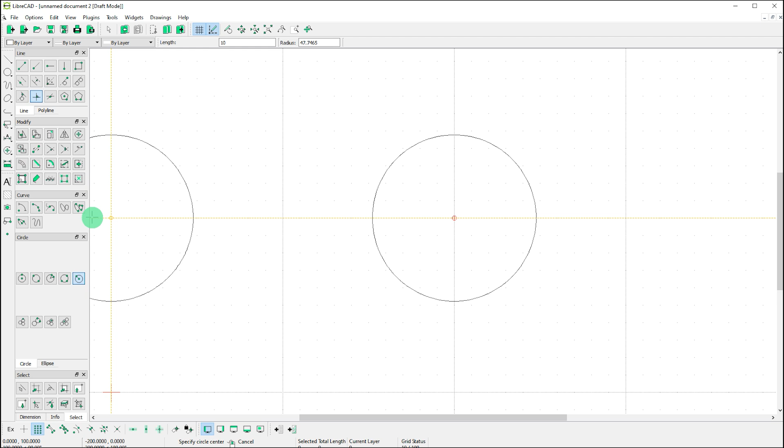Okay, so the next thing I'm going to do is draw a couple more circles, and these can be a little bit more random. So I shall use this circle tool here, the center and point tool, and I'm just going to draw in a couple of lines - in fact I'll just do one line for the minute. And now I'm going to draw a vertical line up through here.

So I can probably just do it with the two-point line tool, this one here. I select here as my start point, left click to start the line, and just randomly anywhere up here, left click to drop it. So let's put that line in. But that line's actually a bit too long - I want to trim that to the outer circumference.

So we can use our trim tool that we've used many times before. Select this as our limiting entity, and remember it tells us at the bottom of the screen what we need to do. So we select the limiting entity there, and then select the entity to trim, which will be that one. Okay, so that's all looking pretty good.

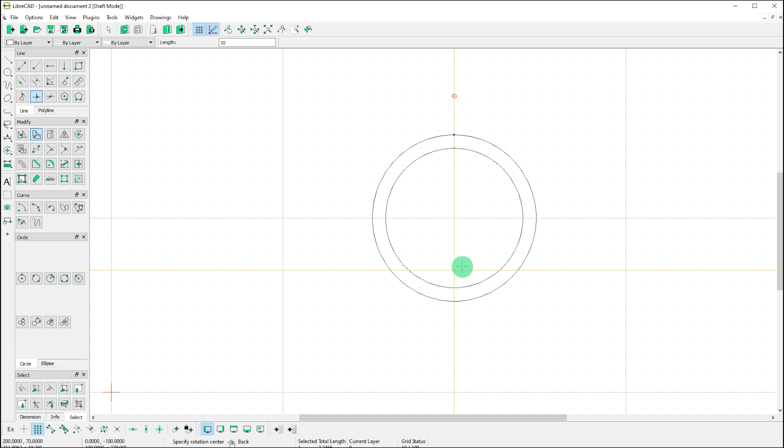Now the next process is quite simple, but we're going to do it a couple of different ways. I'm going to select that little line we've got there, and if I come across to the modify menu and choose the rotate tool, I have to specify the rotation center, and because we centered this up on this crosshair here, that's going to be very easy for me to do.

So I can left click to specify the center, and again it asks me down the bottom here what to do next - specify the reference point. Well, we're going to use the center as our reference point.

And it gives us this familiar box that you may remember from our last episode when we were looking at the move tool. So in this case, we're going to have multiple copies. Because there are 300 millimeters in our circle, we want 300 divisions. We've already got one mark, so let's type in 299.

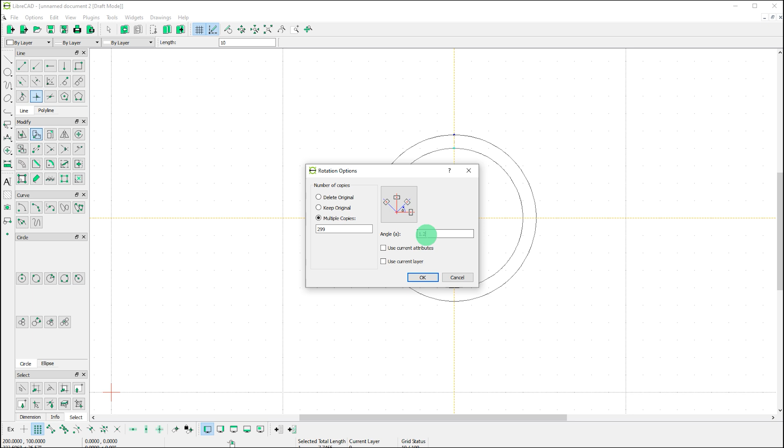360 degrees divided by 300 divisions will give us an angle here of 1.2 degrees. We'll talk a bit more about that in just a moment. So let's click OK, and there we go. If I zoom in, we've got 300 divisions marked around our circle, and that's pretty good. But I think there might be a way in which we can improve this. So let's have a look at that.

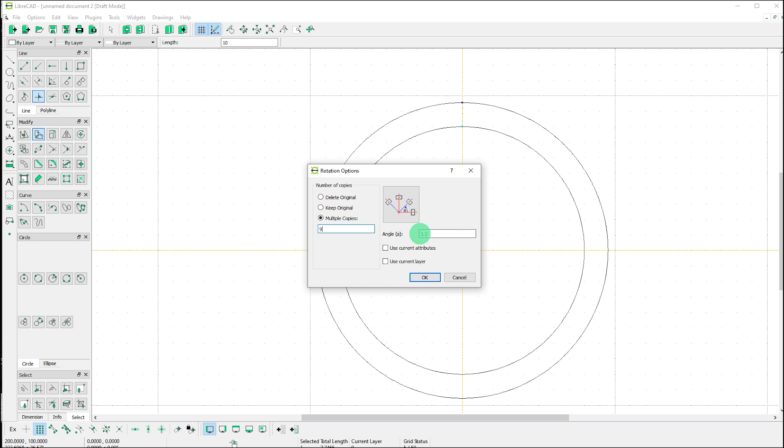Now we're back looking at our drawing, and I've just hit the undo button to undo that last command, leaving us with our single vertical line just here. This time I'm going to rotate that line again. I'm going to select it, come across to the left, use the same rotate tool. I'm going to specify the rotation center as requested at the bottom of the screen, and it now asks me to specify the reference point once again, so that will be the same, and we'll get this familiar pop-up box again. This time we're going to make 9 copies with an angle of 1.2 degrees between them. Hit OK, and now we've got just a small section of our overall scale.

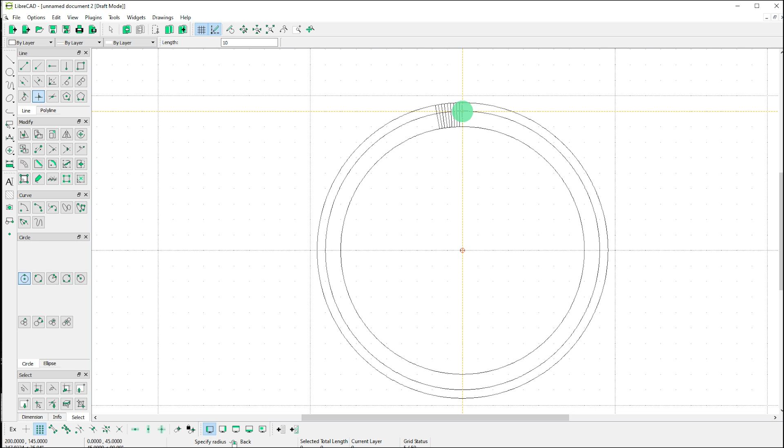What I'm going to do is come back to this circle tool again and pop a second circle in, using the 2-point circle. This doesn't need to be measured particularly accurately, I'm just relying upon the grid. So I'm going to snap to the grid there, and there's our circle.

So what we could do now, let's zoom in here and have a closer look at this. What I'm going to do is trim some of these intermediate lines so that they form shorter divisions between, say, if this was 0 and we were working round to 1, 2, 3, 4 and 5 and so on, I just want to make some of these little marks a bit shorter.

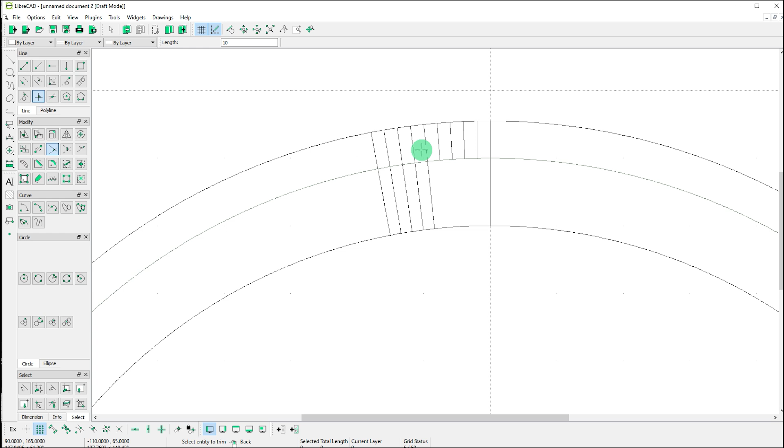So I'm going to choose the trim tool, and it asks me to select a limiting entity, which we will make this one here. Then it asks me to select an entity to trim, so I'm going to select that one and just work along this line. Okay, that's pretty good. What I could do now, I don't think I need this circle here anymore, so I can delete it. In fact, no, I won't, I'll keep it in just for the moment.

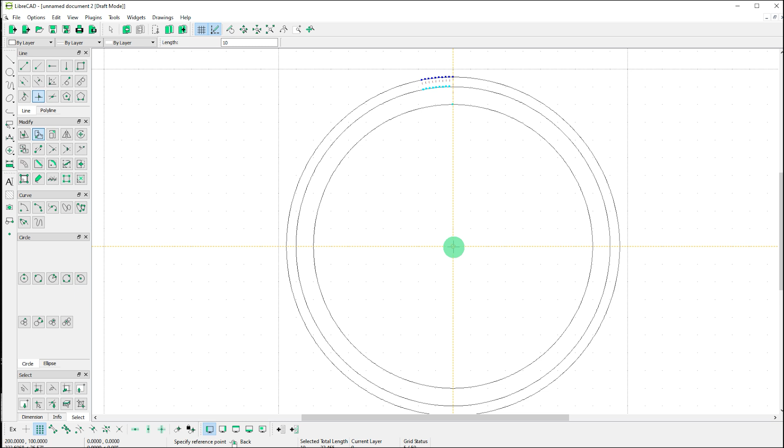Let's zoom back out and have a look and see where we're at. That's all looking pretty good. I can now select those items, come back to my rotate tool, specify rotation center, and the reference point, which again will be on the center. Now what I want to do is make 29 copies of this that will run around to complete the full circle. So I type 29, and this time we'll have an angle of 12 degrees because we're moving 10 steps at once. Hit OK, and there we go.

There's our scale. So our scale, let's imagine that the top here will be the 0. We'll go 0, 10, 20, 30, 40, 50, 60, 70, 80, and so on in millimetres all the way around till we get to 280, 290, and then 0 and 300 will be on the same line.

So is there anything else we could do to further enhance this? Well, yes, it would be quite nice to have numbers on here corresponding with the measurements that we've delineated around the perimeter of this thing. So for that we can use the text tool, this big capital A over here. I'm going to select that, and I've got some text pre-entered here, 0 to 300 millimeters. I've chosen a height of 2 millimeters, and I've chosen the ISO font.

Of course, we could change all of that and make that whatever we fancied. We could specify an angle here, but I'm not going to do it just now. I'm going to hit OK, and it'll ask me to specify an insertion point. Well, it could be anywhere, but just for now, I'm going to drop it just here. Okay, so that's got our first bit of text in.

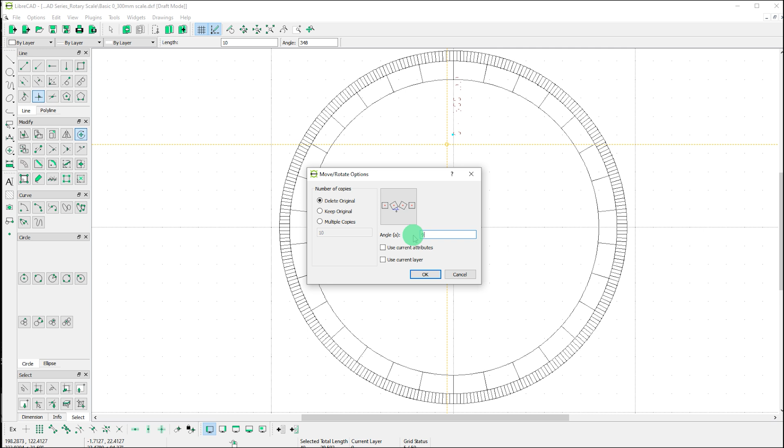Now it's not quite where I would like it to be, so I can select here, use that Move Rotate tool again. I've still got the grid switched on, so in this case I could turn the grid off and specify my reference point, which will be there, and now I can move this about. Let's try it just there, put the angle of 90 in again. Oops, I've flipped it around by 90 degrees, so let's undo that.

In fact, let's just do a straightforward move this time. Select the item, move. Reference point could be here, and then we'll move that to there. Okay, I want to delete the original, hit OK, and there we have it. We've got our scale in the right place. And we can just repeat this now, working around all of these divisions until we get everything just how we want it.

So let's have a go at doing just that.

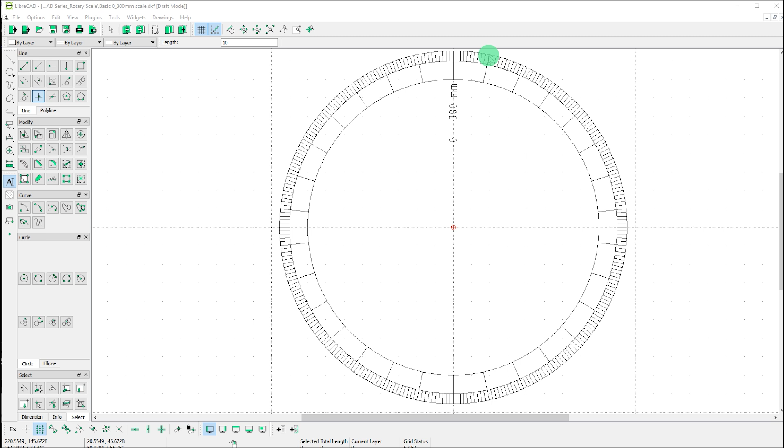Let's look at adding some more text to this drawing. When entering text, it's worth bearing in mind a few things. An angle of 0 degrees would be effectively like this horizontal line across the page, moving from left to right. If this was our origin, 0 degrees would be here, and then it would go around 10, 20, 30, 40 and so on. Which is why this went in at 90 degrees. So this is 90 degrees. 180 degrees would be coming back this way, and 270 would be downwards.

So let's enter a piece of text in for just here. This line here would represent 290 millimeters, and we know that the angle between there and there is 12 degrees, so that would be at an angle of 90 degrees minus 12. Let's see how that's done.

I'll come here to my text tool and select it. I'll put my text in, which will be 290, and I'll leave the millimeters off. We'll put an angle in of 78 degrees and hit OK. Now, if I turn the grid off and specify an insertion point, let's go for somewhere like that. There we go, there's our 290, and it's slightly out of place, but it's in the right angle, so we can change that.

Reposition it as we wish. Let's just do a couple more. I won't do all of these now because the video would be ridiculously long, but let's try a couple more. Let's do 280, and in this case the angle will be 78 minus 12, which of course will be 66, and we can drop that in there. Again it's slightly off, but you get the idea.

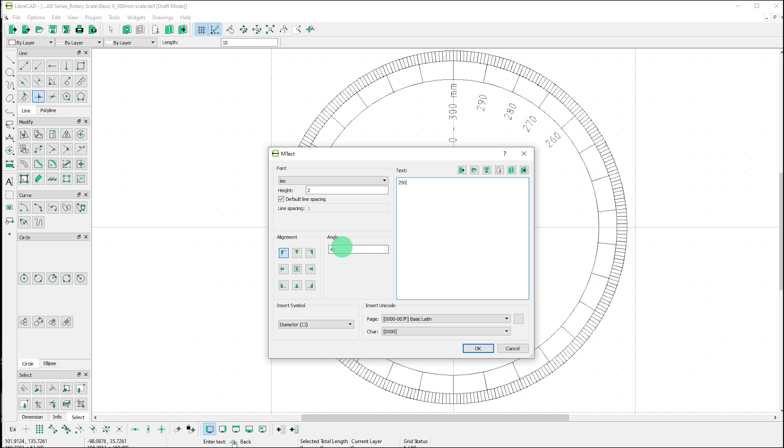54 minus 12 will be 42. We can pop that in. Next one will be 250, with 42 minus 12 giving 30. We can pop that in there.

Let's just finish off this last couple here. So 250, and the next one will be 240, with an angle of 30 minus 12, which will be 18. Let's pop that one there, and we'll just do one more, which will be 230, where 18 minus 12 is 6.

And there we go, and we can continue working all the way around until we've completed the scale. Perhaps that's something I'll have a go at in just a moment.

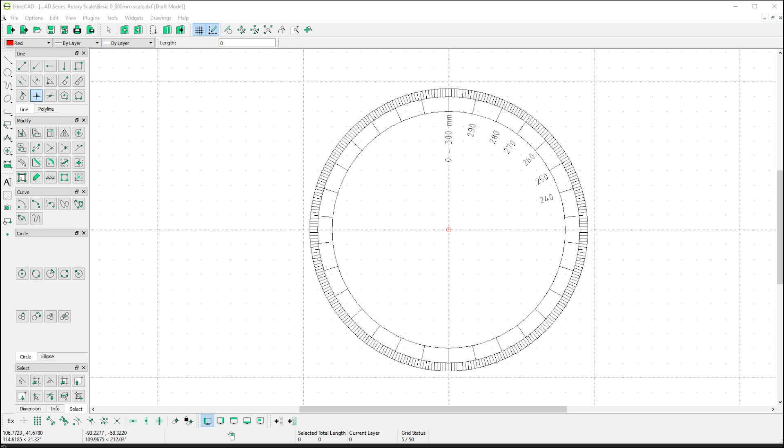So does this tool have any practical application whatsoever? Well, I first came up with this idea, and it may not have been original, but several years ago I needed to measure an irregularly shaped object, and I needed the measurement to be reasonably accurate, and this tool did the job for me, or a variation of it. I was thinking about this the other day when thinking about spacing out the stools for the point rodding.

On the Bexhill West project, these stools need to be at a scale distance of 6 feet, which at 4mm to the foot is a spacing of 24mm. So we could use this tool to set these out.

So for example, let's just zoom in a little bit. Now this would be better if I'd finished the scale off and put all of the measurements on, but not to worry, for now this will do. So this is our 0 reference, this will be 10, this will be 20.

So if I count along, it's 21, 22, 23, 24. So I've selected the 24mm line. If I come over here to the left-hand modify menu, there's a control to lengthen, so I'm going to hit lengthen.

It's got a length of 12 in there from when I last did this, so I shall keep that the same - we could change that to whatever we want it to be. And then down the bottom here it asks me to select the entity to trim or enter distance. Well, we've got a distance entered in, so I'm just going to select that once again, and that extends that line for me.

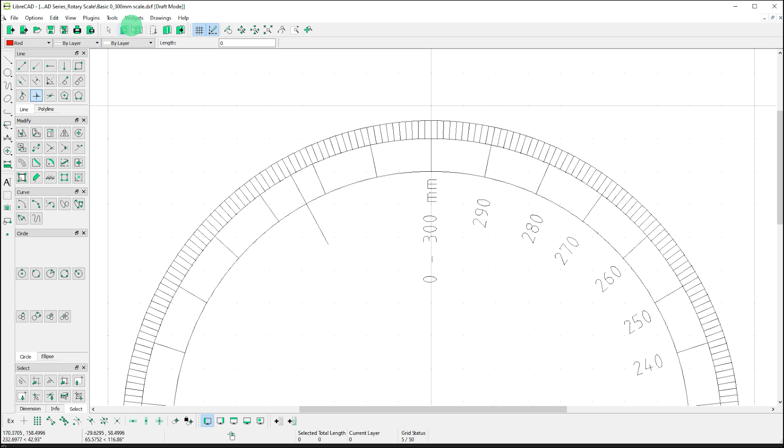Now, I totally accept that doing this way is of no great advantage over just using a straightforward ruler. But I just wanted to use it as an example to show how we could create something useful and deal with angles. And it kind of builds on what we looked at in the last episode of repeating patterns, in that it's a similar thing.

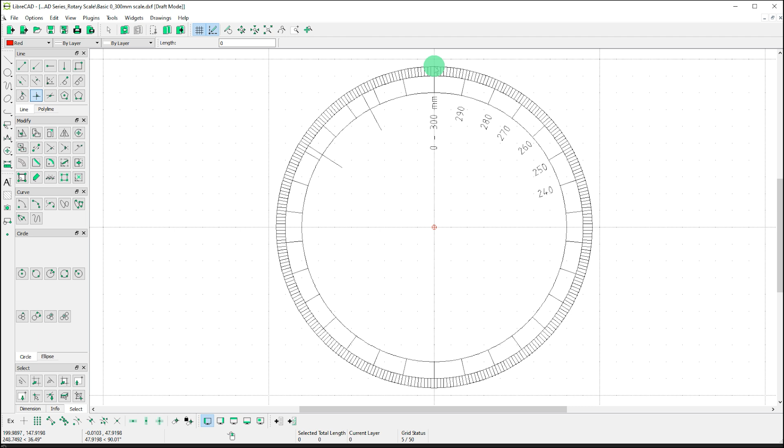So if you recall, we haven't really drawn very many lines here. We've drawn 3 circles, only one of which was accurate, the outer radius of 47.75 or whatever it was. We've drawn 2 inner circles which were sort of just drawn randomly to the grid, and then we've used the rotate tool just to copy our first line around which we've trimmed.

So now's perhaps a good time we could maybe delete some of these other lines, and there you go, a rotary scale tool, useful for maybe not very much, but you never know - if you want to lay out a clock face or something like that, you can use this process.

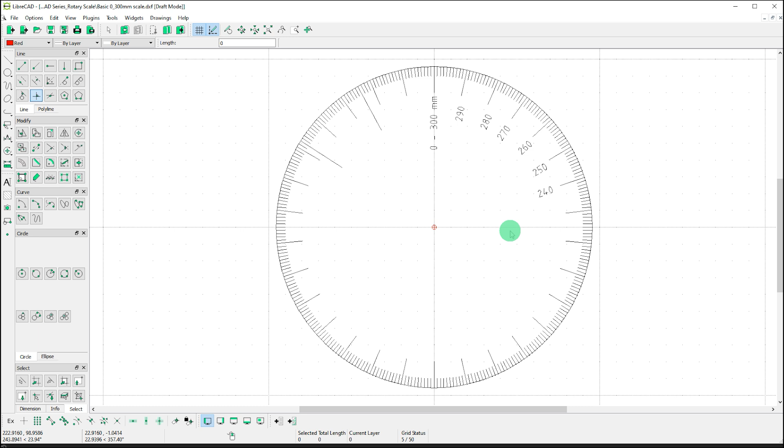Now of course I've made this with a circumference of 300 millimeters. We could do exactly the same thing working in inches. It doesn't need to be 300 millimeters, it could be a different size and what have you. But it's just a thought, a good sort of example of using angles with the rotate tool, and I'd be interested to see what any of you could do with this idea.

So there you go, a probably pretty useless tool for most of the people watching the video. However, there's some useful skills in there that we looked at, so I hope that's of interest to some of you.